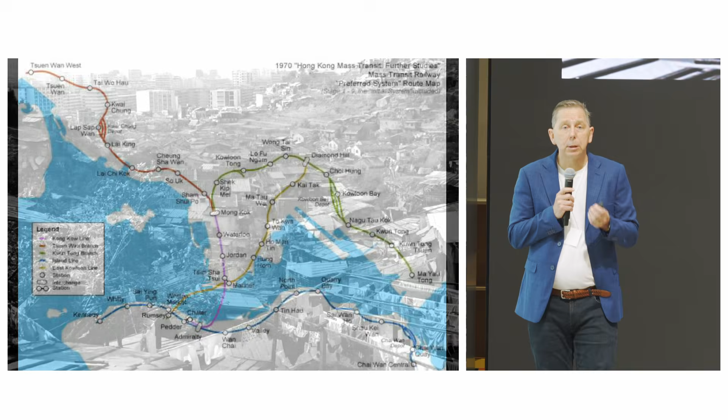But of course, what you need to remember is what did Hong Kong look like in the 1960s and 1970s. This is a photo, I think taken in 1968, and it shows the shanty towns, and then you start to see the modern buildings coming up in Hong Kong. This was generally across the whole city.

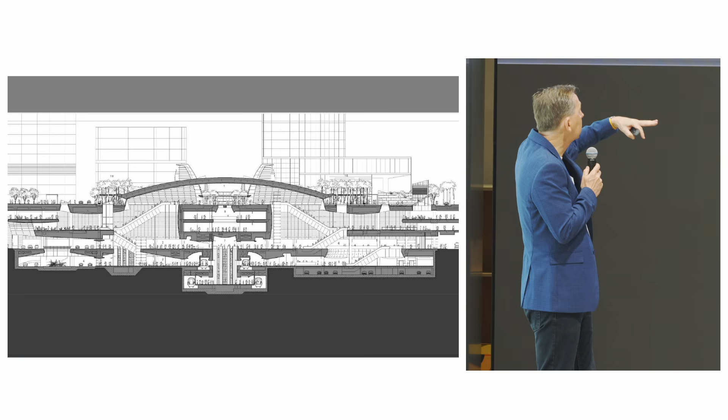So from the bottom up, you have the Tung Chung line, then the Airport Express, surrounded by a shopping center, and those are themselves surrounded by office towers and hotels.

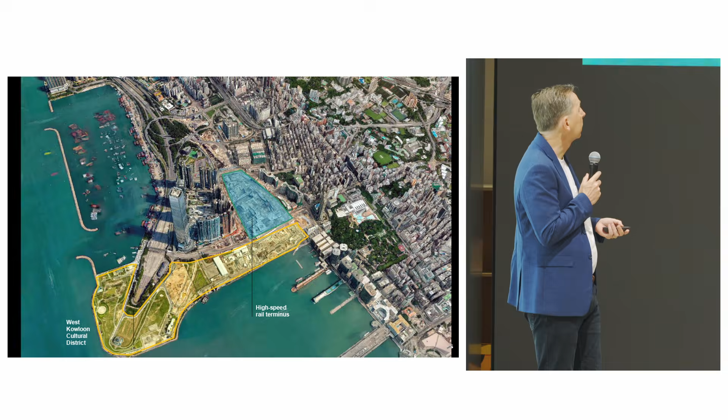In fact, the station extends right down to the waterfront. We actually pre-built a lot of the car parks for the West Kowloon Cultural District as part of the project. A few facts and figures.

It's a really interesting project because it connects to the whole of mainland China but also into Hong Kong, and it sits between two existing lines - the West Rail line and the Tung Chung line and the Airport Express. So it makes a horizontal connection with all those other lines as well as connecting all the way out to the mainland.

But that's not really what it's about. It's about this next slide - tapping into the world's biggest high-speed rail network.

You can get a train from Hong Kong all the way to Beijing now. It takes about 8 hours on a high-speed rail train. So it's really quite a remarkable commitment to high-speed rail that the Chinese government has given.

And if you've got time, you can go to the building. It's got this amazing rooftop, and it goes up to the top, and you can look back onto Hong Kong Island. So if you've got a little bit of time, it's well worth visiting the building, just walking around the whole of it.

Aerial view of the site, not particularly attractive right now. It's just simply reclaimed. They built a depot facility and stabling facility. There's a test track on the site, but this is what's actually being planned by our friends at Arup: a complete new town. There's 100 towers on this site, and each of them is a minimum of 50 stories high. So it's a real new town. It's got shopping centres, it's going to have its own police station, its own schools. And what I was saying earlier, you can live your entire life in this development as it sits.

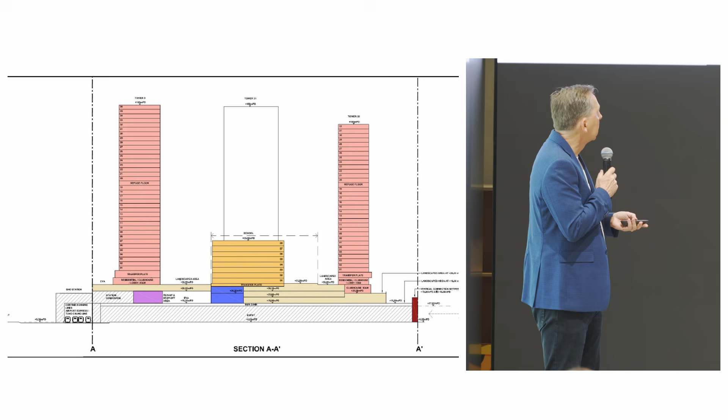So this is a cross-section through the site, and the grey hatch is the depot. It's a bit like Telford Gardens that I showed you through here. You see an example of the towers and the school in there. I don't know why it's jumping around already.

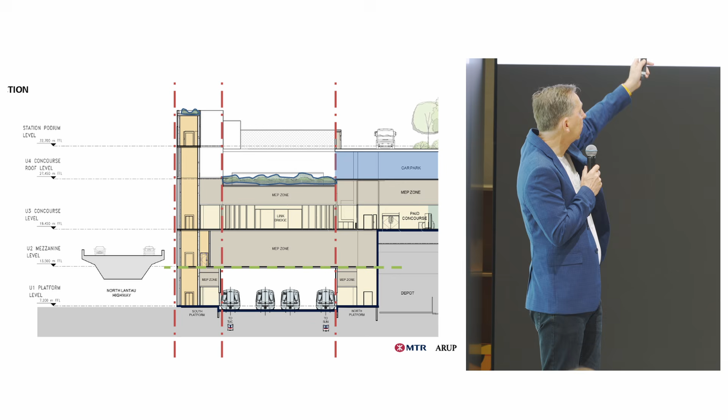But if you zoom into the left-hand side, you start to see the station itself. You have the Airport Express running through the middle and the Tung Chung line, which is the stopping service, going through. Very, very tight site that we had to deal with because we have the highway on one side, the depot on the other side, and then obviously the station is built up above. And we have to get people quite high up into that space. So there's a three-dimensional axonometric of how that station is laid out.

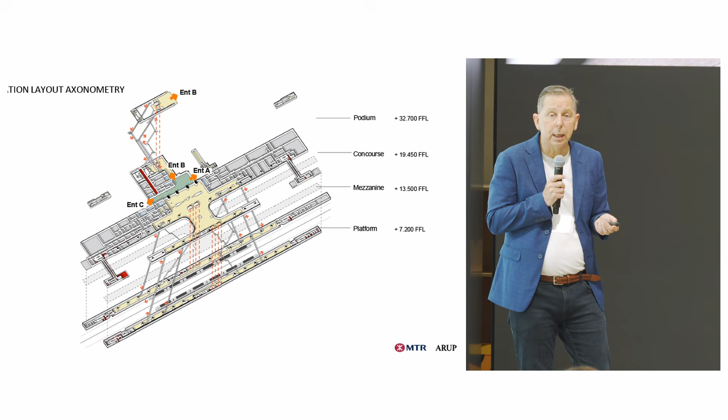Just a couple of images around the new station. This kind of shows my new design philosophy around the use of mosaics. When I joined MTR, and you go and see the Island Line extension stations, you'll notice that there's no mosaic in them. And I kind of said, guys, why is that? Your signature is, we lost the middle screen. Your signature is mosaic. And so we said, well, the operators don't like maintaining it. Does anyone can fix that screen? And they said, we don't like it. And I said, but that's our DNA. That's who we are. Mosaic, bright colors, and the calligraphy. And so I've put it back into our design manual now that every new station shall have this in.

And it can be treated a little bit more sophisticated. So here you see in the middle, the signature color of the station is obviously orange, but it uses a tonality of the orange, not just the one color. And that's the introduction of the more sophisticated approach to the colors that we go through.

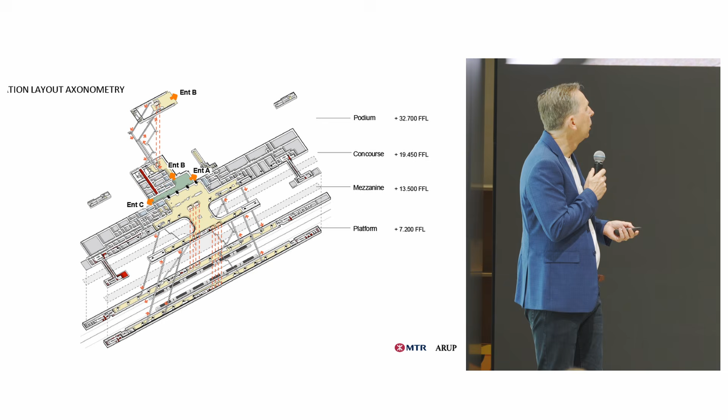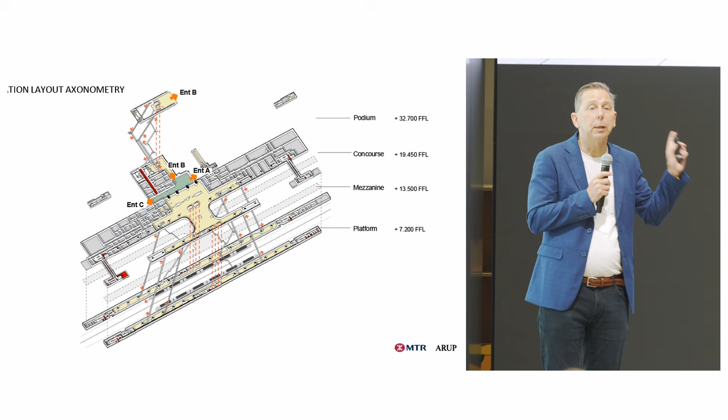My mother, who thought I was going to design her a house, said, 'Don't you ever get bored of designing metro stations, Andrew?' And I said, 'No, I think everyone is different, everyone is unique, and I've had a career that's taken me around the world, designing metros in different cities, in different cultures.' But the real kicker is how many people use my work. Billions of people use my stations every single day. It's up there with iPhone use in reality. And that's why I became an architect, to shape cities and build cities.

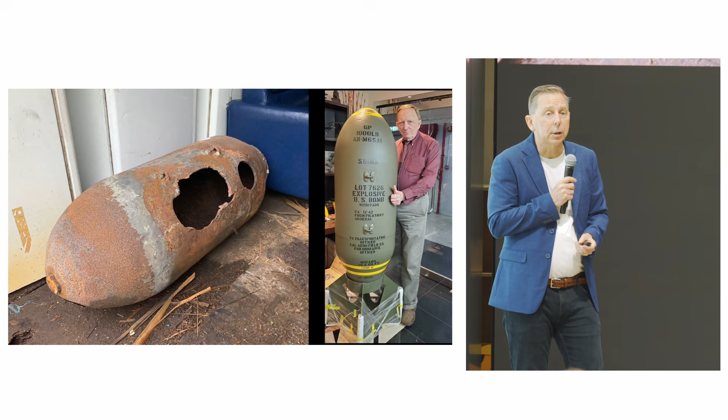It didn't originally look so clean and nice as that. This is when the bomb squad got over it. Interestingly, with the explosive, what they do is they burn out the explosive, which seems like a completely wrong thing to do, but that's how they do it.

Jeff, who's a local historian, did all the research and recreated this actual replica of the whole bomb as it would have looked like when it came out. So up on the top left-hand side there, you see that, so you get a view of what the bomb would have looked like.

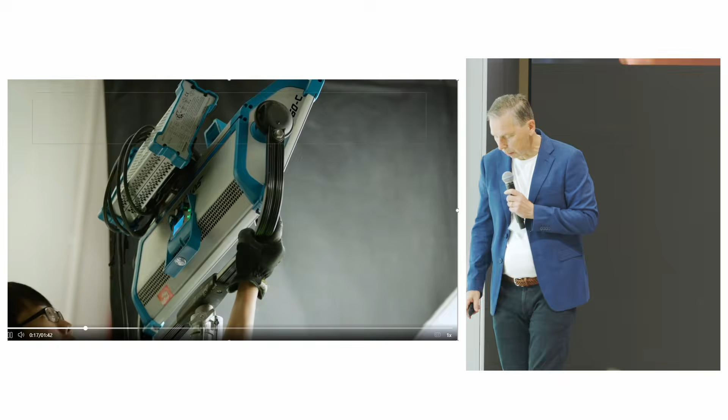Okay, because this is the making of it. This is the Hong Kong Ballet team, and we shot it—a lot of it was green screen at their rehearsal studio at the Cultural Centre. We worked with Jevan, the director, and one of the things—not a visual artist, not a photographer, because he's a film producer—he made all these little videos of the whole production, which was really interesting. You can produce a book and visit the station, but the real magic is actually the making of this, getting people to collaborate that wouldn't normally collaborate together.

Whilst we have professional ballet dancers in here, there are also cameo appearances by myself and MTR staff. We go down to the station. For those who came on the tour yesterday, you met Kwok. Kwok is in one of the photographs right in the station. My secretary's in there too, and other friends are in the artwork permanently on the walls. So it's a really collaborative process right through to create the entire art.

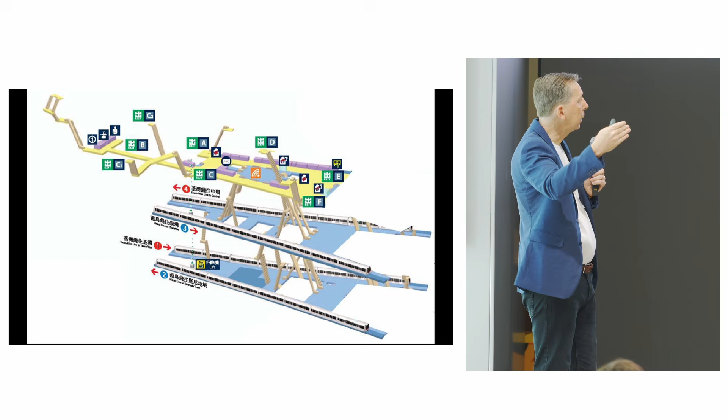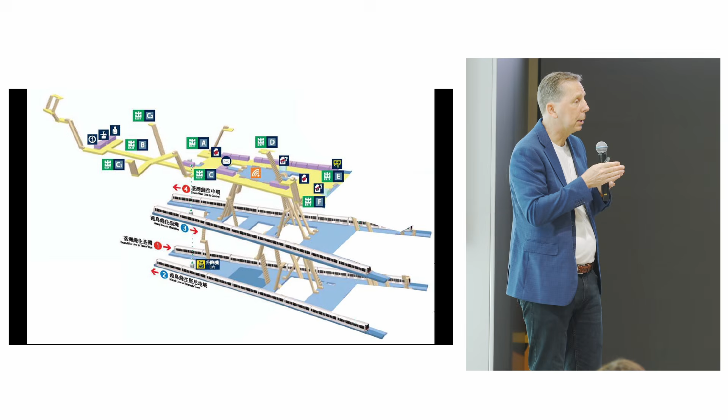This was the station that we inherited, designed in the 1980s. It's interesting that it brings 2 lines together, the Tsuen Wan line and the Island line, vertically stacked on each other to enable cross-platform interchange between the two lines. Because one line comes across the harbour and the other comes along the island itself, the station is actually a big V shape, and we used that V to create the new station.

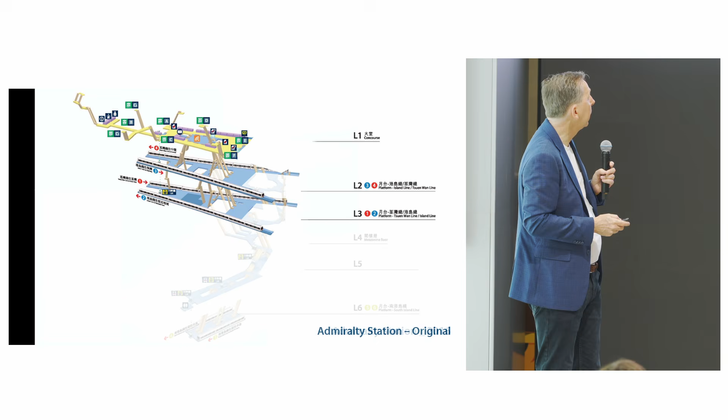So if I click onto the next slide - that was the existing station. Then the first thing we built was the lowest station along the way, now 6 levels below ground level. That one opened around 2014, 2015. In 2022, we opened the rest of the station with the East Rail extension when we finally got the connection going across under the harbour. So you can see the complexity through here.

We went through many, many iterations of how to move the people around - I was asked about this several times yesterday. There was a lot of Legion modelling going on to ensure we could move people around safely as we wanted. A bit of the BIM model shows the 2 lines, the red line and the blue line, and the new construction happening underneath.

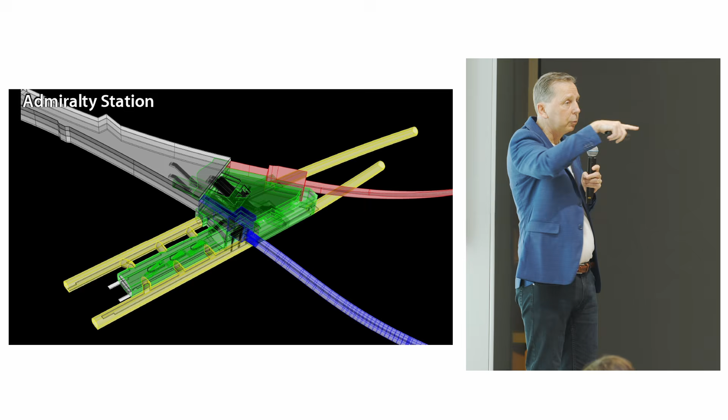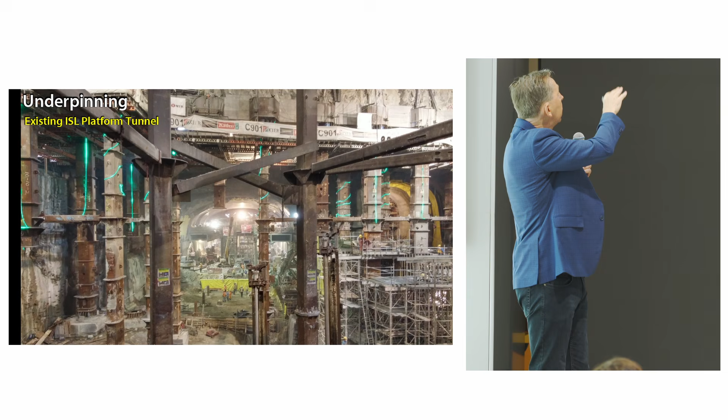The entire station was constructed in that little triangle where the park was, that I showed you yesterday. This is the station under construction - in the back you can see the main cavern that we were going through, and to the left and right of that are the running tracks. Where the words say C901, that's actually the Island line running across, supported on steel superstructure underneath. We didn't stop the railway running for a single day while building this - it was really quite an engineering achievement.

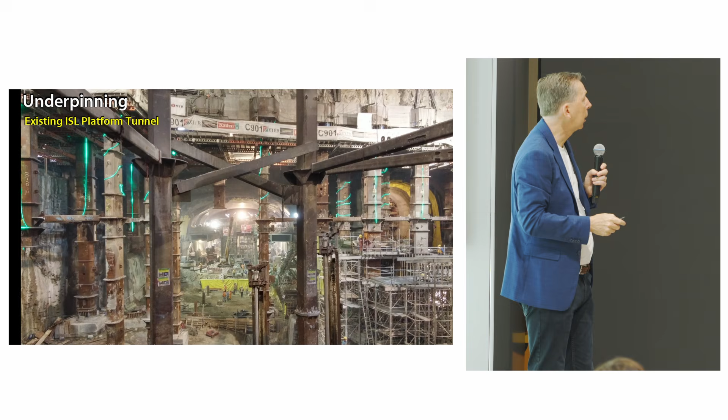And with that, we also upgraded the existing station. It was starting to look a bit tired, it was a blue station, and one of the problems was it had blue on blue on blue. From a circulation point of view, it's really hard to see your way around.

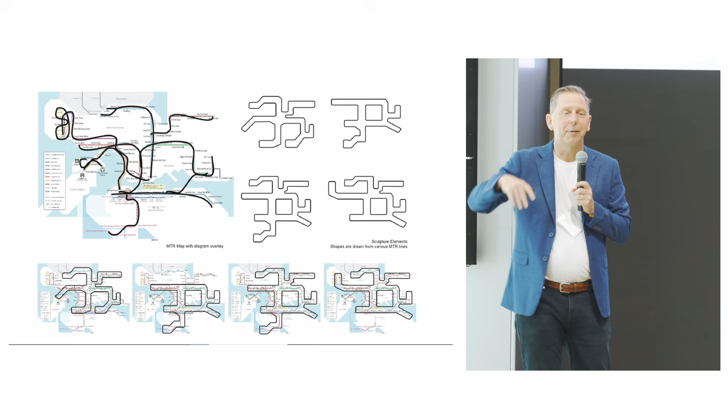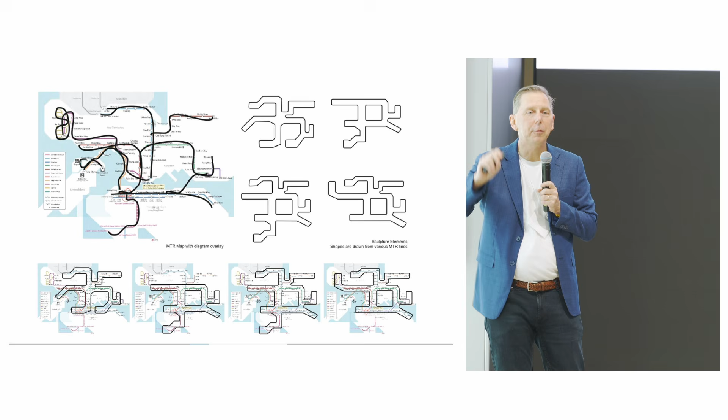I hear interesting stories about the various artworks, and one of the most common misconceptions is that the artwork comprises Chinese characters. Anyone who reads Chinese will know these are not Chinese characters. They're actually based on sketches drawn over the Hong Kong metro map. For a metro mapping symposium, I thought this would be a nice detail to take away, where you can boast to your friends. You can see the actual characters she's created. She sat down with our map and traced over the lines to create each of the 4 symbols on the artwork.